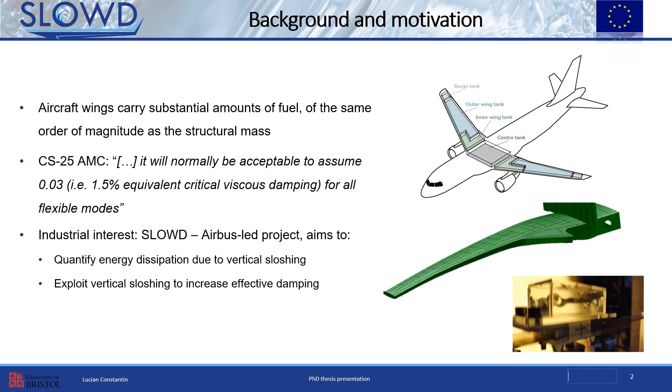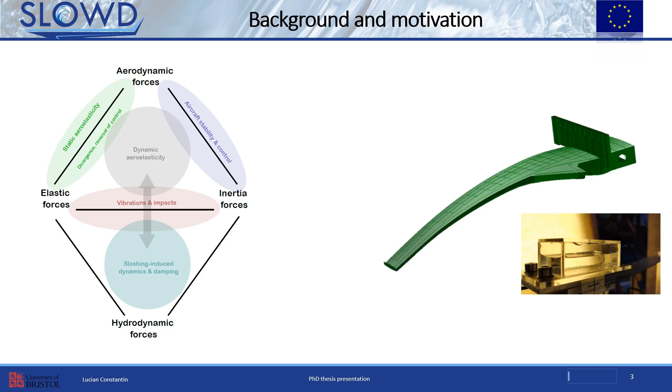These observations lead us precisely to where liquid sloshing would fit in the larger aeroelastic picture. Classically, aeroelasticity is a field of study placed at the intersection of three more fundamental interactions: elastic phenomena, inertial forces, and aerodynamic forces. The sloshing fuel is thus not modeled at all during the aeroelastic design phase of the aircraft.

There is this fourth component, which is not connected directly with the aerodynamic forces, but it does interact with them via the interaction with the wing structure.

It is thought that the inclusion of fuel sloshing during the design phase may lead to less conservative designs via the increased damping due to vertical sloshing. The reason it is not included right now is that it is rather poorly understood and modeled.

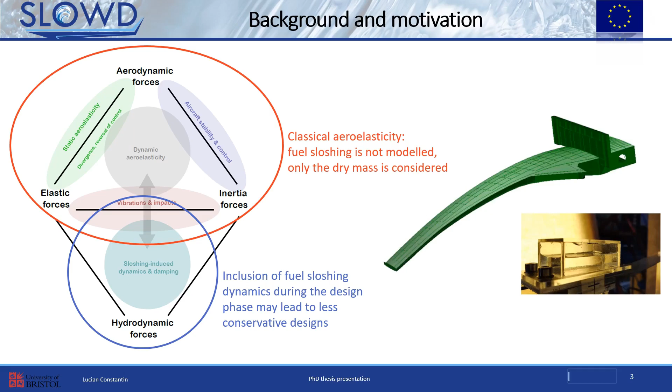Having established the background, let us turn to my thesis aim and objectives. The aim is to analyze the nonlinear dynamic interaction between aircraft wing structures and the fuel inside them, with a focus on discrete gust-type excitations.

Five specific objectives were set at the beginning. The first two objectives are set for the understanding of the fundamental mechanisms that cause the sloshing-induced damping, as well as for the initial quantification of the sloshing-induced effects in single degree of freedom vertically vibrating systems.

Based on the fundamental data gathered for objectives 1 and 2, I plan to develop numerical models in order to offer further insight, and also because they are highly relevant to current academic and industrial research. My focus was on equivalent mechanical models developed for fast evaluation of large amplitude vertical sloshing regimes, to be perhaps also included in control systems.

With a solid fundamental understanding of the vertical violent sloshing-induced damping effects, objective number 4 imposes the quantification of these effects on a scaled wing research prototype. The aim was to develop such a wing sloshing platform, instrument it, and test it in order to evaluate major influencing parameters that I noticed in previous experiments.

Finally, objective 5 seeks to synthesize the sloshing-induced damping effects based on what were quantifiably the most important influencing parameters, such as vertical acceleration and filling level. I use synthesis here in the sense of combining all components and elements to form a connected whole, namely linking the phenomena observed by investigating the single degree of freedom and multi-degree of freedom systems and the numerical models.

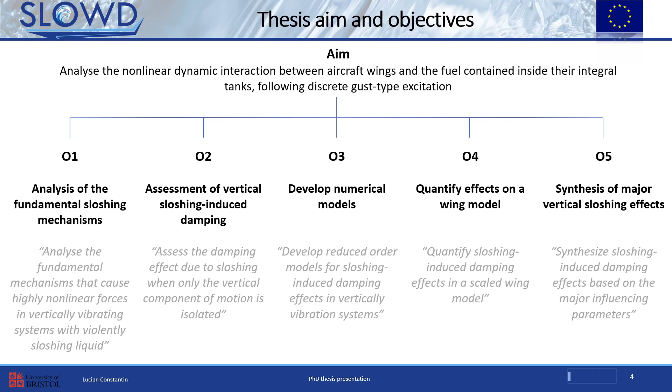In order to achieve these aims and objectives, I structured my work as shown here. It is roughly divided into 2 parts, with the first 5 chapters involving relatively fundamental research and analysis, and the final chapter presenting an applied study.

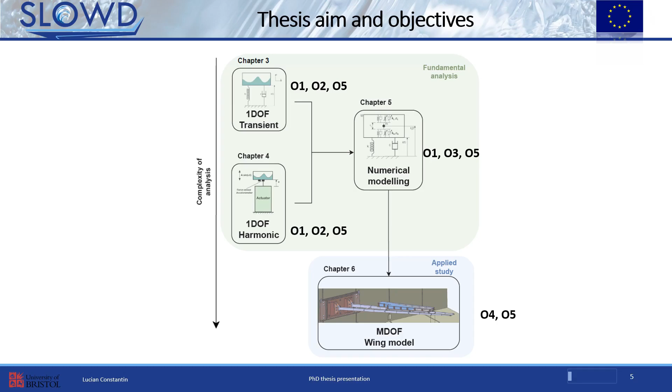Chapter 3 is concerned with the experimental analysis of a transient single degree of freedom system, Chapter 4 with the analysis of several single degree of freedom harmonically excited systems, and Chapter 5 with the development of equivalent mechanical models based on these experiments. Finally, Chapter 6 considers the design and testing of a multi-degree of freedom scaled wing research prototype, applying all of the previously learned lessons to this more realistic test platform in order to achieve objectives 4 and 5.

As also stated before, the main direction of sloshing in bending wing tanks is vertical. Let us thus start with the single degree of freedom vertical sloshing experimental studies, presented in Chapter 3 of my thesis. The design of this study implements a vertically vibrating tank which is deformed to an initial deflection and then released into free decaying vibrations. The free vibrations of the system are then analyzed.

Conceptually, such a vertically vibrating single degree of freedom sloshing system could have an elastic and a damping element as presented on the left-hand side. A low value of dry structure damping is desired in order to improve the sensitivity of the system to sloshing-induced damping effects. The experimental implementation studied in this research is presented on the right-hand side.

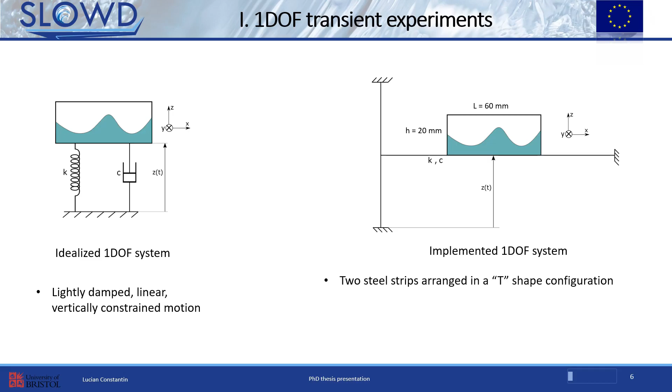Two 1 mm thickness steel strips are used as the elastic element, their T-shaped configuration allowing for substantial linear deflections of the attached tank of up to 14 times the strip thickness. It was shown that this configuration limits the tank motion to the vertical direction.

Alternative configurations are possible too, like the approach of our colleagues at the Polytechnic University of Madrid, where they used grounded springs instead of steel strips.

The system vibrates at a dominant frequency of 10.05 Hz and the measured stiffness is 1100 newtons per meter. This leads to an equivalent mass of the system of approximately 276 grams. The dry structure damping ratio value was experimentally measured in the interval of 0.23 to 0.34%.

A slight nonlinearity in damping can thus be observed, the damping increasing slightly at high accelerations. This, however, is inconsequential to the experiments presented here.

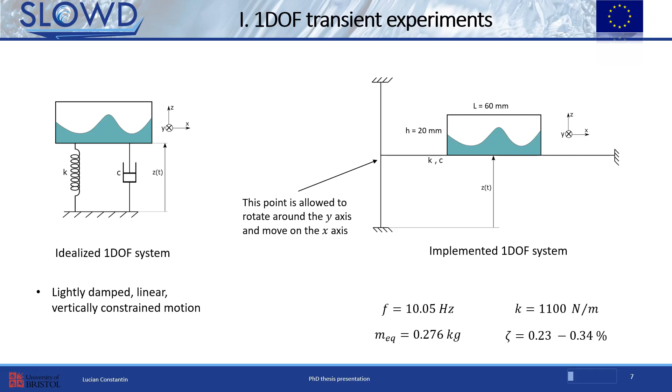An accelerometer is placed underneath the tank in order to measure its dynamic decaying response, and a high-speed camera was also used for further image analysis of the sloshing patterns.

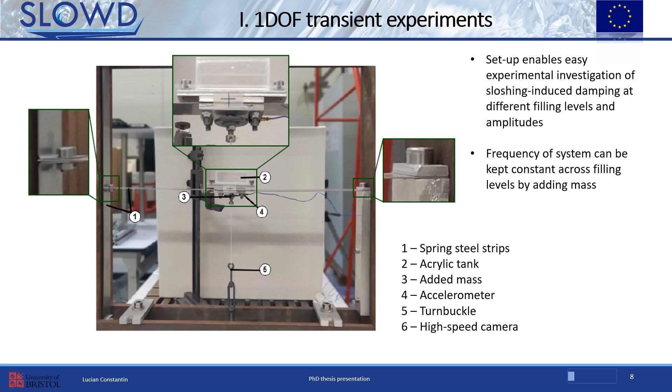Let us now move to results. In this slide we can see a time history of the tank accelerations for the dry structure versus the 50% filling level case. First of all, there is a marked difference in the response amplitude between the two cases, adding water into the system reducing the tank amplitude quicker.

The frequency of the system is kept constant at 10.05 Hz, regardless of the filling level by using the added mass. The energy dissipation rate was observed to be exponential, typical of viscous-like damping, and having different values at different times. This leads to the emergence of three different damping regions.

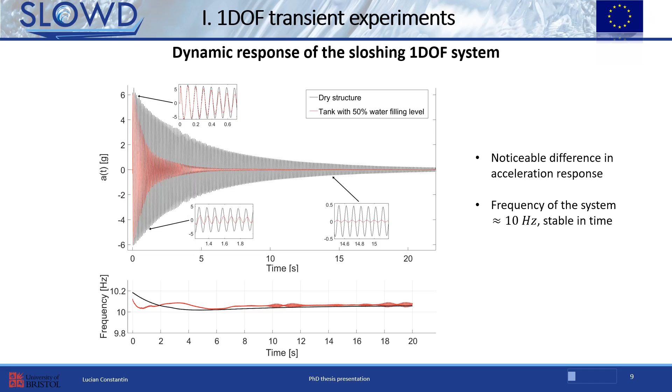Although harder to notice on a linear scale, it is oftentimes easier to observe damping behavior on a logarithmic scale. In this example, only the envelope of the acceleration signals for the 50% filling level and dry cases are represented on a logarithmic scale. If the envelope varies linearly on a log scale, the viscous damping ratio can be measured from the slope of the curve.

It is thus easier to observe the three damping regions corresponding here to the three different linear regions. First of all, it's important to note the very low damping in the dry structure, seen by the slope of the black curve in this graph.

Also, you can see here the very small nonlinearity in damping I mentioned earlier, and how it really has no effect on the larger picture.

A correlation has been observed between the different damping zones and the physical behavior of the fluid, as seen here and categorized as region R1 with turbulent vertical fluid motion, region R2 with symmetric lateral sloshing motion, and region R3 with small fluid activity following the tank base motion.

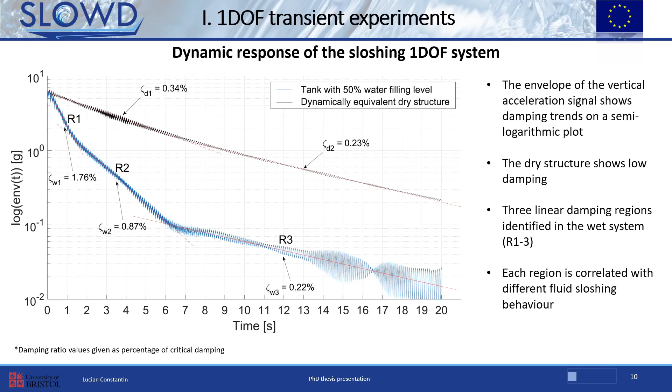It is worth taking a closer look at the fluid's behavior in these three damping regimes. In the first region, corresponding to the highest levels of damping, the fluid absorbs energy out of the primary system via repeated impacts with the bottom and ceiling of the tank, as you can see in this video. This regime is thus characterized by violent, turbulent vertical motion of the liquid.

A damping ratio of approximately 1.76% was obtained for this particular experiment, the tank's peak amplitude being reduced from 14 mm to approximately 3 mm in little more than 10 oscillations.

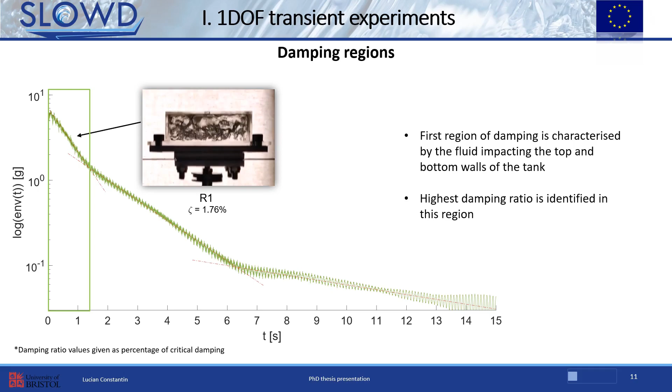The second region of damping occurs immediately after the peak acceleration level in the system reaches 1 g, and the turbulent vertical motion of the fluid is stopped.

R2 is characterized by fluid sloshing on its first symmetric sloshing mode, in this case, for which standing waves with symmetric motion is typical. The dissipation mechanism is related to the transfer of energy from the vibrating primary system to the fluid sloshing on one of its modes.

The damping ratio obtained is lower than what we've seen in R1 at 0.87%, and the peak amplitude of the tank is reduced further in R2 from 3 mm to approximately 0.4 mm in this case. Substantial levels of damping are thus associated with R2 as well. Also notable is the duration of this regime, lasting for approximately 5 times more cycles than R1.

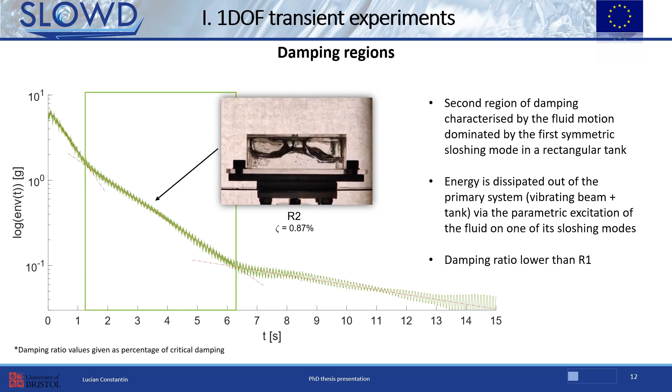The third region of damping is relatively uneventful. At the end of R2, the motion of the system is greatly reduced, and consequently the fluid stops sloshing as well. The value of the R3 damping ratio is the same as the dry structure damping at 0.22%.

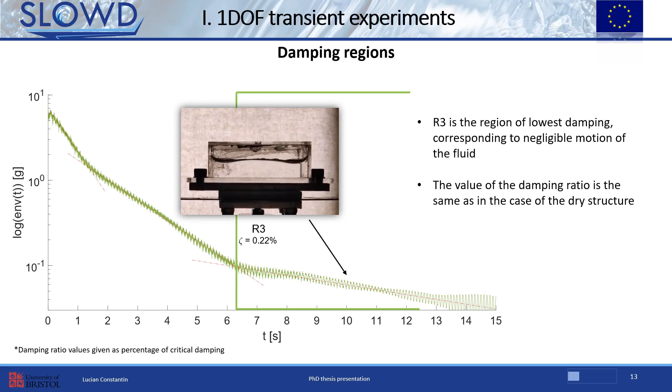Two different sets of experiments were performed to systematically investigate the effect on sloshing behavior when varying the filling level in the tank, and also when increasing the initial deformation before the step release. The aim of the first set of tests, on the left-hand side, was to explore the effect of different tank filling levels on the transient response whilst maintaining the same initial deformation.

The beam was pulled downwards by the cord attached to the turnbuckle so that an accurate and repeatable amount of deflection, 14 mm in all cases considered here, was possible. Filling levels between 0 and 100% were considered.

The second set of tests considered the effect of changing the initial displacement between 1 mm and 14 mm, and hence the maximum acceleration experienced, which is up to 7 Gs, before the system was released into free vibrations. These tests were repeated for 3 different water filling levels of 30, 50 and 70%.

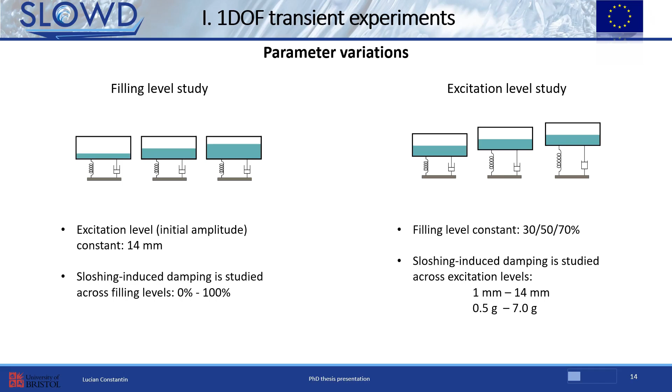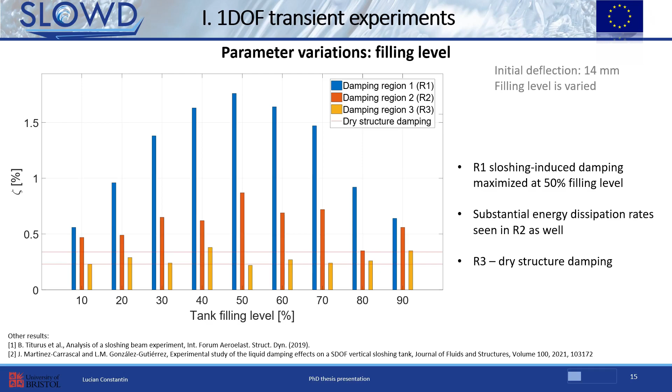The R3 damping is found to be very low overall and close to the underlying damping of the dry structure. This finding is consistent with the qualitative behavior of the fluid observed in the previous slides, namely that in region R3 the fluid contributes very little to the system's energy dissipation.

The effect of excitation level or maximum acceleration level on sloshing-induced damping is assessed by varying the peak acceleration via different initial deflections for 3 different filling levels. The main result is shown in this figure, where damping in the first region is shown as a function of the maximum acceleration amplitude A0 over G.

The damping trends for the 30, 50 and 70% fill level cases are compared. As in the previous slide, it can be seen that the R1 damping levels for the 30 and 70% filling levels are similar. A piecewise linear function was fitted over the R1 damping versus maximum acceleration data.

Two linear regions are thus established, and similar slopes are obtained for all 3 filling levels, with the line corresponding to the higher excitation levels having a considerably lower slope compared to that at lower excitation. The damping ratio thus only increases slightly after the acceleration threshold is reached, mainly due to the dry structure damping nonlinearity.

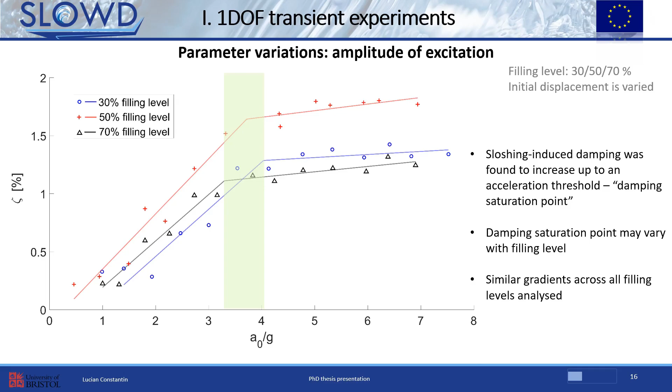It follows that only slightly more energy is absorbed in the R1 region as the maximum acceleration level goes past the approximately 3.3 G threshold. The second experimental campaign is focused on the harmonic excitation of rectangular partially filled tanks in the vertical direction, and it was done in two parts using different actuation techniques.

This was done in two parts using different actuation techniques. We have already seen how the sloshing system behaves under transient large amplitude conditions, and we now shift focus to steady-state behavior with well-controlled sinusoidal motion, thus constant amplitude and frequency of excitation.

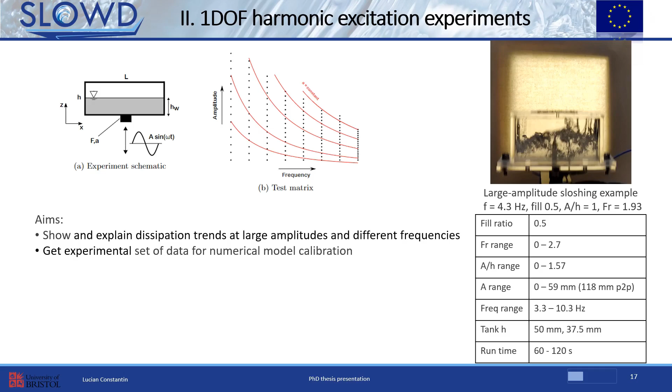The specific aims of this study are to show and explain the dissipation trends at large amplitudes and different frequencies of excitation, and these are the types of regimes that are considered here. The second aim is to gather supplementary experimental data for numerical model development and calibration.

The main challenge in this type of study is achieving large vertical amplitudes whilst maintaining the tank dimensions large enough such that the effects that we are interested in are still dominant. So for example, we will have no significant surface tension effects.

The setup thus consists of a rectangular tank, 100 by 30 by 50 millimeters, partially filled with liquid, placed on top of a large amplitude shaker with a force sensor in between. An accelerometer is also placed on the tank in order to collect the tank acceleration, velocity, and displacement information.

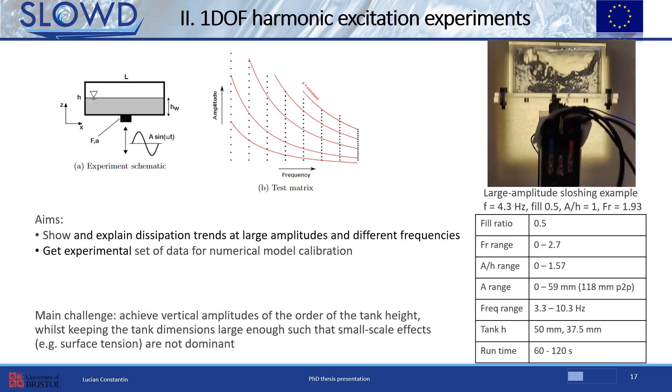Different amplitudes and frequencies of excitation are considered according to a pre-established test matrix that you can see here, with the details presented in this table. Each amplitude and frequency combination was studied independently, with each test running for a sufficiently high number of cycles in order to achieve steady-state behavior and to have a representative number of tank cycles to analyze.

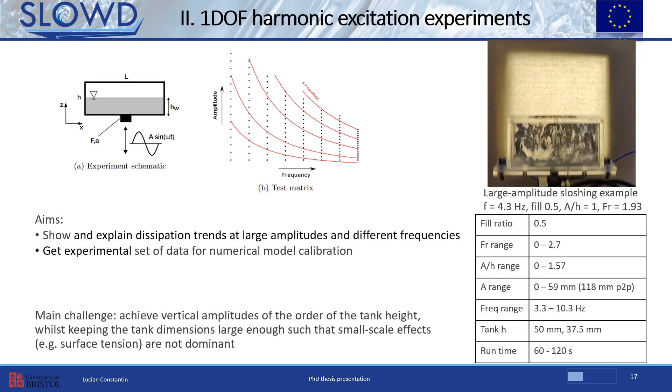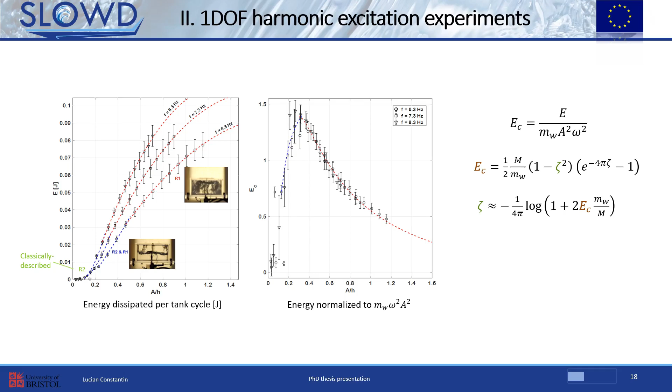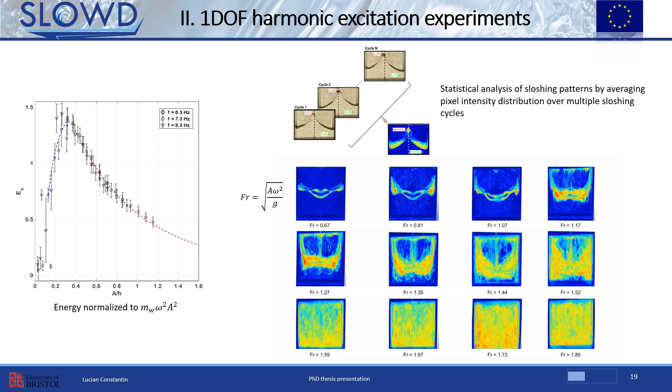The velocity field of the liquid relative to the tank can also be obtained using optical flow, shown here with the black arrows and the streamlines in red curves. These are some instances of the sloshing pattern at one set amplitude of excitation. Together with the sloshing force information, which can be derived from the force sensor, and the information from the accelerometer, there is complete kinematic and dynamic information that is available experimentally for detailed analysis.

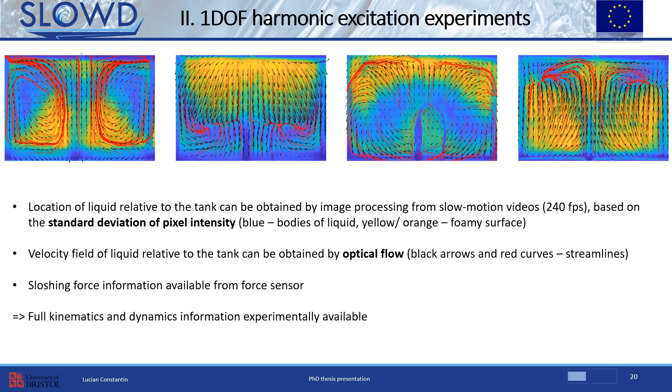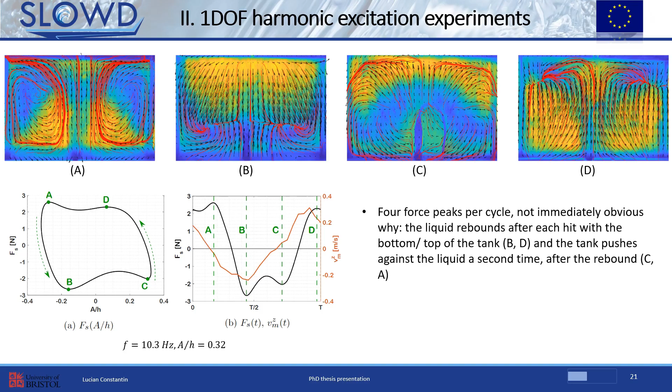This phenomenon is easier to see at large amplitudes by looking at the liquid mean relative vertical velocity, the orange curve on the right-hand side. Following the rebound of the liquid, as the tank goes upwards, the liquid starts to push against the bottom of the tank the second time, creating a new interactional activity against the upwards motion of the tank. This effect causes the average liquid bulk velocity, Vzm, to be constant between points B and C, and subsequently the recorded sloshing force features a second peak at point C.

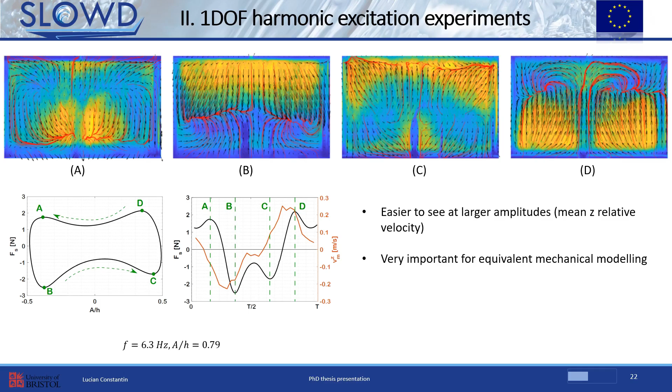This happens because the phasing between the tank velocity and sloshing force changes, with the liquid hitting the bottom of the tank, aided by gravity, before the tank reaches its minimum stroke position. Under such conditions, the sloshing force does not act in quadrature to the tank velocity anymore, and, instead of having a dissipative effect, it rather adds energy back into the system.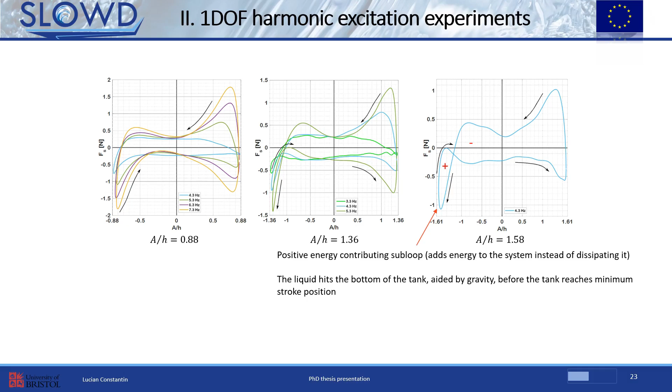In turn, the development of these secondary hysteresis subloops explains why the dimensional energy dissipation trends deviate from the linear increasing trend at large amplitudes, with a decreasing parabolic trend being introduced for all frequencies of excitation.

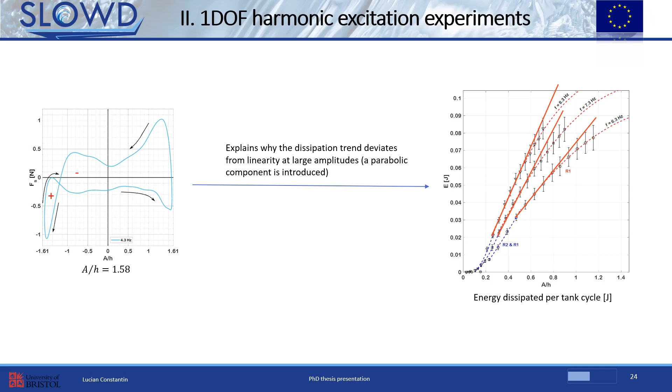This wealth of experimental data can be further used for the development of numerical models. The use of numerical tools at different levels of fidelity, such as smooth particle hydrodynamics (SPH), volume of fluid (VOF), and equivalent mechanical models (EMMs), or reduced order models (ROMs), is well established in fuel sloshing and fluid structure interaction research. With the advent of high-performance computing, the use of detailed high-fidelity models for liquid sloshing problems is an attractive option. Alternatively, when in need of fast or large numbers of computations, such as for optimum wing design, the use of low-fidelity models might be preferred.

Equivalent mechanical models are based on simplified representations of the physics involved in the problem and provide a simpler formulation of the dynamics of the sloshing system.

As this work is concerned primarily with a transversal out-of-plane dynamic interaction between a sloshing liquid and a tank, this leads to a problem formulation different in nature compared to classically investigated sloshing systems where the liquid movement is lateral. In this work, I considered three different equivalent mechanical models, emphasizing their different features and limitations, together with supplementary explanations based on the model physics.

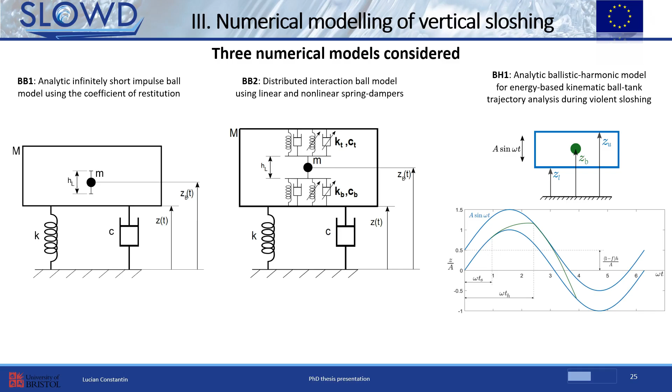The following numerical models are studied in this work with their key characteristics: an analytic infinitely short impulse ball model using the coefficient of restitution; a numerical distributed interaction ball model using linear and nonlinear spring dampers; and an analytic ballistic harmonic model for energy dissipation, using ball-tank trajectory analysis during violent sloshing. I will take each of them separately and present their main features and results.

In the first approach, I modeled the bulk vertical motion of the liquid using a ball falling under gravity and interacting with the tank via a coefficient of restitution. The work on this model is motivated by the T-beam transient experiments discussed earlier, and the focus is placed on the R1 vertical violent motion.

Based on experimentally observed behavior, namely how the violent vertical liquid motion causes additional damping, this work uses a phenomenological EMM, where a simple linear spring damper mass oscillator is combined with a single free-flying ball contained and interacting with the upper and lower boundary of the oscillating system's mass.

The spring damper mass part of the model represents the mechanical structure with the tank of mass M (uppercase), stiffness K, and damping coefficient C. The ball in this model represents the fluid during its vertical R1 sloshing stage.

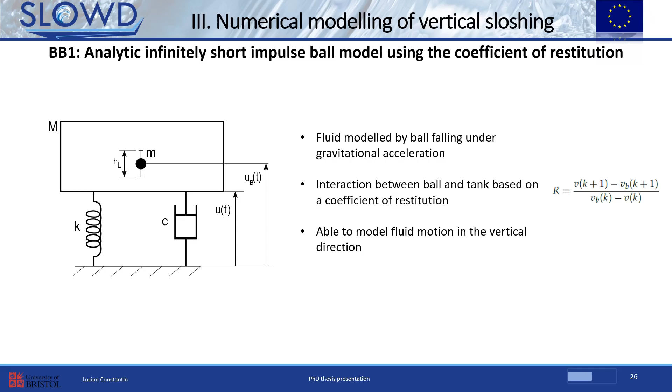While classically referred to as a bouncing ball, in this case it behaves as a bouncing rigid body because it has a certain height, HL, depending on the water filling level, and is represented in this figure as the rigid bars above and below the ball. This model was tuned over multiple filling levels and tested against multiple amplitudes of excitation.

Here we see a comparison between the experimental data, the equivalent mechanical model results in black, and higher fidelity SPH simulations performed by my colleague Joe DeCourcy. The EMM gives good results in R1, the region with vertical impacts, and it does not model R2 at all.

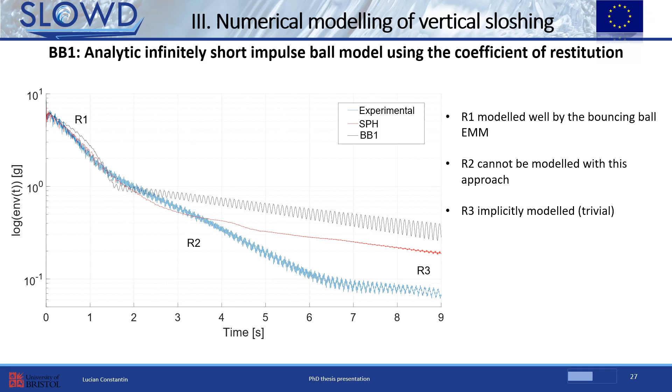Thinking about what R2 means, remembering this type of low amplitude permanent wave motion, it indeed cannot be modeled by a vertical bouncing ball. In comparison, the higher fidelity SPH simulations model part of the R2 region.

It is interesting to note the almost exponential envelope in R1, as shown experimentally and predicted with SPH, whilst the EMM indicates an evolution that deviates from this trend. On average, the damping ratio is the same in R1, but the different envelope shapes indicate a different dissipative mechanism.

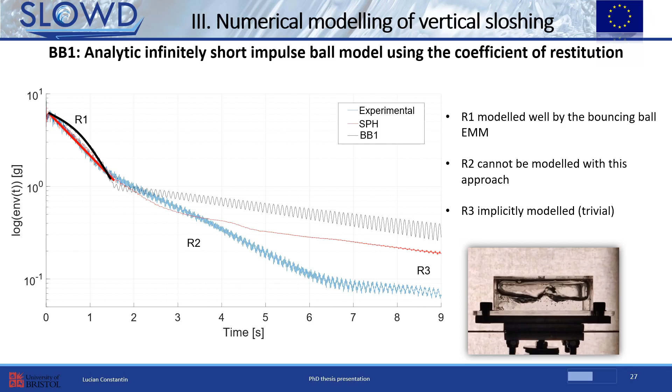Finally, we can look at the variation of R1 damping with respect to the amplitude of excitation, horizontal axis here. Both sets of data predict the same damping saturation point, and the mean values are similar, indicative of good prediction capabilities across a large range of amplitudes of excitation.

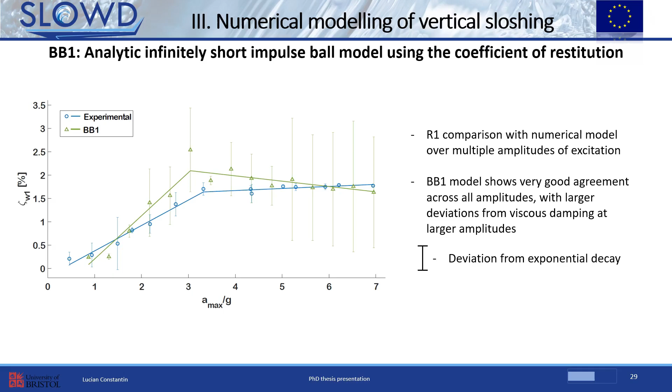However good the agreement is, this model has certain shortcomings, namely the effect that the dissipative mechanism indicated by the coefficient of restitution approach seems to be different than the actual sloshing experimental prediction. This aspect is likely related to the fact that the sloshing interaction is distributed across the tank cycle, as we

have seen, whilst this numerical model only considers discrete ball-tank interactions, many times only 2 of them per tank cycle, as shown here as maximum and minimum tank displacements. One model that addresses this aspect is the distributed interaction model, which I present next.

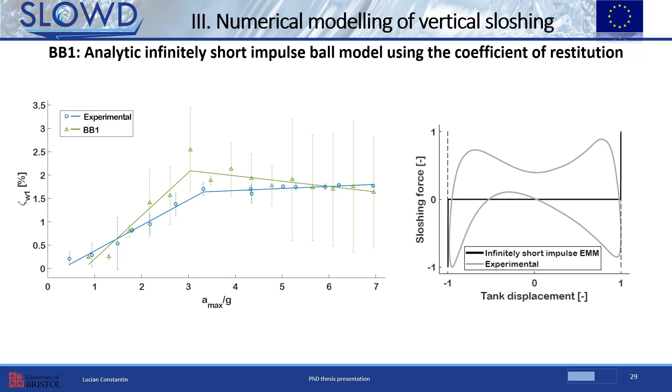The aim with this second model is to address these differences by investigating the possibility of using nonlinear spring damper connections between the bouncing ball and the tank, replicating at least certain aspects of the hysteresis cycles observed experimentally. There is a combination of bottom and top linear, third order and fifth order springs and dampers to model the ball-tank distributed interaction. The top and bottom elements can be different in order to make it easier to introduce possible asymmetries in both the bottom and ceiling interactions, even though they are kept the same in this work.

Similarly to the previous model, this one was tuned by minimizing the difference between the experimental and numerical energy dissipation prediction.

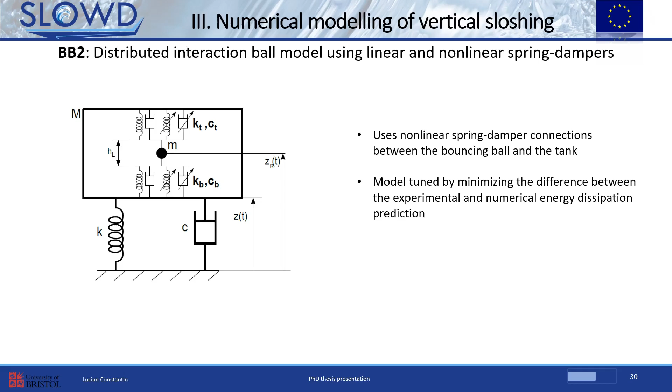Jumping to results, this figure shows a comparison between the experimental and numerical results in terms of dissipative energy per cycle and sloshing forces. Note that there are no error bars associated with the numerical results in this case, as there is no time variation in the numerical hysteresis cycles and hence in the induced dissipative energy.

The numerical results were computed using 2 different types of damping indicated by the values J, namely dependency of the damping force on the third and fifth power of velocity, according to the relationships shown here.

The dissipative energy versus amplitude results on the left-hand side indicates a very good match between the model with the two different damping scenarios and the experimental results. For the third-order damping case, the energy values are slightly over-predicted for the lowest and highest amplitudes, showing a decreasing trend past the amplitude normalized to tank height of 0.3, with a lower slope than observed experimentally.

The fifth-order damping case shows a closer match to the experimental results, with a similar high-amplitude trend and better low-amplitude prediction. According to the hysteresis cycles that are shown on the right-hand side, in the j=3 case, the shape of the hysteresis cycle is very similar to that observed experimentally, but rotated counterclockwise.

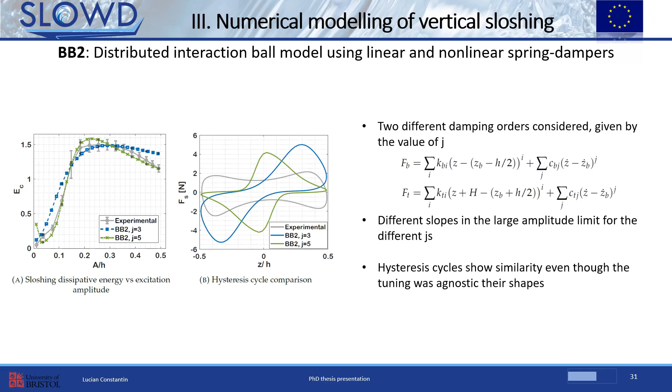The modeling approaches considered thus far were based on different formulations of the impact force between a ball and a tank, namely via a coefficient of restitution which causes a change in momentum, or combinations of springs and dampers which increase the complexity of the interaction.

Earlier, however, it was shown that there is a similar large amplitude damping trend, at least inside a considerable frequency range, meaning that the non-dimensional energy dissipation curves overlap in the frequency range of 5.3 to 10.3 Hz. Moreover, similar damping trends were observed and modeled using the same tools in the field of particle impact damping.

There is thus a strong indication that, at least at large amplitudes, the vertical sloshing system exhibits energy dissipation properties that transcend the liquid-specific qualities. The motivation of this numerical approach is to exploit kinematics-based reasoning for the fast and efficient computation of damping saturation limit and the large amplitude sloshing-induced damping.

The hypothesis here is that at large Froude numbers, the kinematics of the problem, or the liquid tank impact velocity and the number of liquid tank roof or bottom impacts in one cycle, is determinant to the amount of the sloshing-induced dissipated energy.

In order to test this hypothesis, a kinematics-based ballistic harmonic model, called here the BH model, is employed. The analysis assumes the fluid may be treated as a single lumped mass following a ballistic path within a harmonically oscillating upper and lower wall, as indicated in this figure. The sinusoidal motion of two fixed distance walls is considered with a particle between them. There is no lateral motion, the fluid may not fragment, and no free surface modes are considered. Collisions are treated as inelastic, although this is clearly a significant simplification, one which can only finally be justified by the relative accuracy of the derived model.

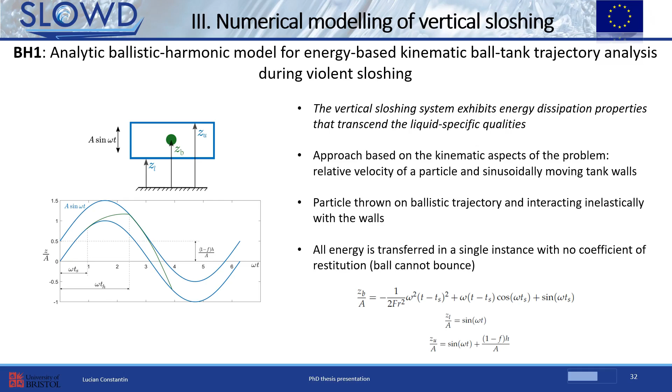Kinematics-based reasoning of the dissipation trends is explored at multiple frequencies and amplitudes of excitation. This type of experimental data was shown earlier and is also used here for comparison against the BH model.

These figures show the interpolated experimental sloshing energy surfaces and the corresponding experimental maximums EC, shown in red squared markers. In the same figure, there is also shown the BH prediction for the maximum EC values, the gray curve, and the curve above which there are intersections with both ceiling and bottom of the tank, the dashed gray curve.

As the acceleration of the tank increases, it imparts to the ball a high enough energy such that it hits both the ceiling as it goes up and the bottom of the tank as it comes back down, both within one single tank cycle. It can be seen that the experimental data generally follows closely this trend established by the BH model. The dissipative energy is maximized in the vicinity of the region where the kinematic conditions are met, such that the liquid can impact both the top and the bottom of the tank twice per single tank oscillation cycle.

This observation is important because it provides additional support to the idea that the lumped liquid behavior is the determinant for the amount of energy dissipated following the vertical interaction with the tank. Specifically, the kinematic condition is related to the initial velocity that must be imparted to the liquid, causing it to enter a ballistic trajectory inside the tank such that two impacts with the tank per one cycle are possible.

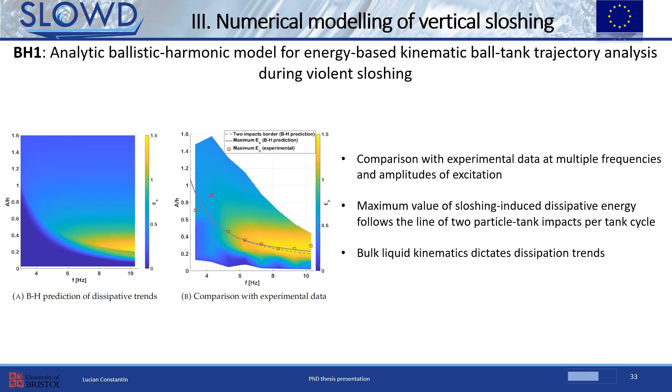The same numerical data can be used to show how the tank vertical acceleration varies with tank amplitude and frequency when EC is maximized. The major assumption of this model is that there is a steady-state harmonic tank motion. It does not take into account transient effects, even though similar conclusions may still be applied to transient cases where the vertical flow develops rapidly.

For example, having in mind the T-beam system discussed earlier, this graph indicates that the vertical acceleration for which a system vibrating at approximately 10 Hz maximizes the induced damping effect is 3.5 Gs. This value corresponds very well with the experimentally observed damping saturation point shown earlier.

To sum up, three vertical EMMs were investigated in this thesis, each with their own advantages and disadvantages, emphasizing different aspects of the vertical sloshing interaction. In what follows, I am going to present the last part of the thesis, which was concerned with an applied, more complex study.

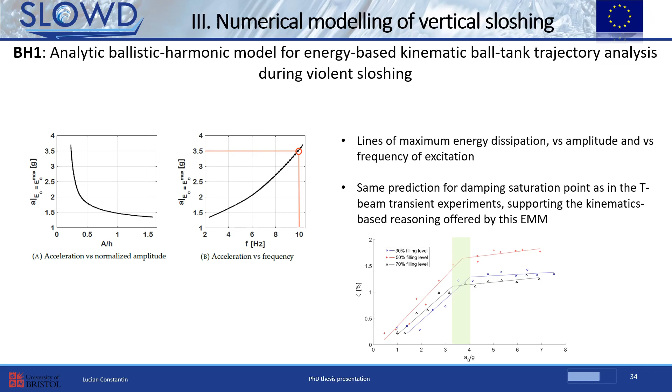Going back to the structure of my work, the final step in understanding the complex vertical violent sloshing phenomena in aircraft wing tanks is to study a multi-degree of freedom scaled wing model. The setup is called MiniWoT, or Mini Wing of Tomorrow, and it represents a scaled research wing prototype whose structure and fuel tank was Froude scaled such that it correctly represents the dissipative energy due to sloshing in a scaled way.

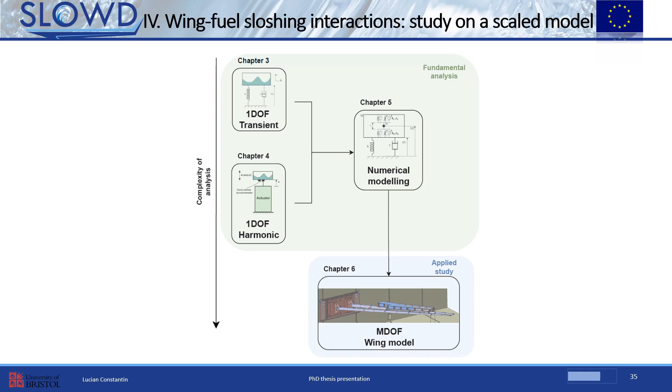The scaled structure setup is shown here. It is approximately 3 meters long and consists of an underlying structure with 2 spars and 5 torque tubes cantilevered to a strong wall, shown here in blue. The main feature is the scaled fuel tank spanning a considerable length of the model, which had to be placed on top of the structure in order to observe the sloshing patterns.

Two loading points, one at the leading edge and one at the trailing edge, are used to load the structure down and release it. Following the release event, the structure vibrates freely and its response is measured using accelerometers distributed across the model, shown here underneath. One accelerometer at the tip of the tank is used for the current work. Two high frame rate video cameras are used as well to observe the liquid inside the tank from top and lateral.

I'm going to present multiple sets of tests, such as the case with 50% filling level where the baffled tank is filled to 50% capacity with water, and the equivalent dry mass distribution case where the liquid is replaced with its frozen equivalent. Multiple parametric studies were conducted though, where the filling level was investigated as well as the initial amplitude, baffle design, and dihedral angle.

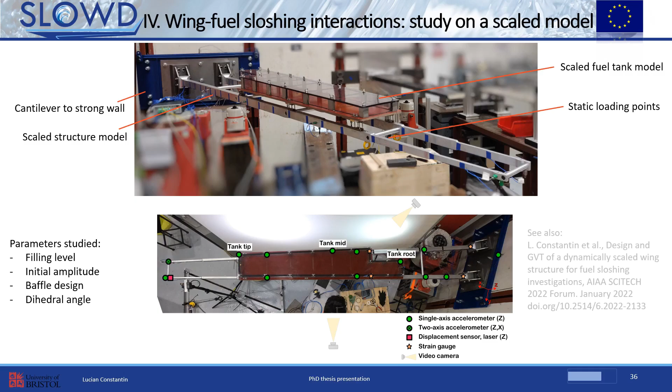Let us start by looking at the acceleration at the tip of the tank versus time for the two cases. Note that the time values are normalized to the period of the first bending mode. Each test was repeated three times, and mean values of accelerations are shown here, together with the red and green bands indicating minimum and maximum acceleration values.

Following the step release event, the motion decays freely and the response is multimodal, as multiple frequency components are excited. As time progresses, each frequency component is damped at different rates, as can be seen in the insets here. This also shows that immediately after the release event, the wet structure has significantly lower acceleration amplitudes, indicating important additional damping effects.

These acceleration signals can be unpacked into their frequency components and studied comparatively. A nonlinear least squares approach was used for the transient system identification, and today I'm not going to delve into the details of it, as this single discussion in itself can be quite lengthy, but rather jump directly to the results.

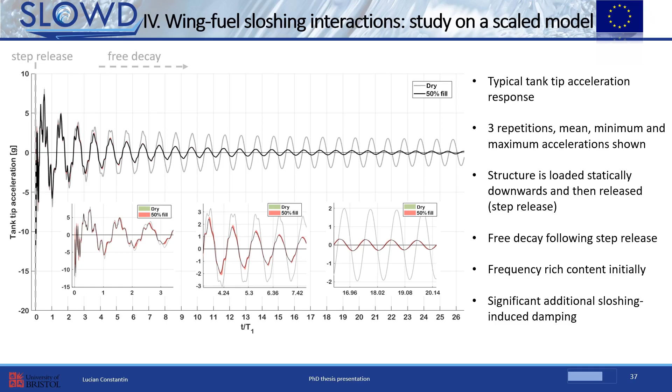Here you can see a representation of the dominant structural vibration modes that were used for the identification of the dry system. This is an amplitude-frequency characteristic of the dry signal shown previously, and note that because the system is nonlinear and the frequency is not constant in time, we make the distinction between uppercase F, which corresponds to the natural frequency of the system, and lowercase f, which is the frequency of the time-varying component.

There are four dominant normal modes: the first and second out-of-plane bending mode, the first torsional mode, and a higher frequency bending mode, and you can see the corresponding shapes shown here on the upper side.

The FFT of the reconstructed signal using the nonlinear least squares procedure is shown here in green as well, and there is a very good match between it and the original system, indicating that all features of the system are correctly captured. For this presentation, I will only focus on the first out-of-plane bending frequency component, as this one was found to be most affected by fuel sloshing.

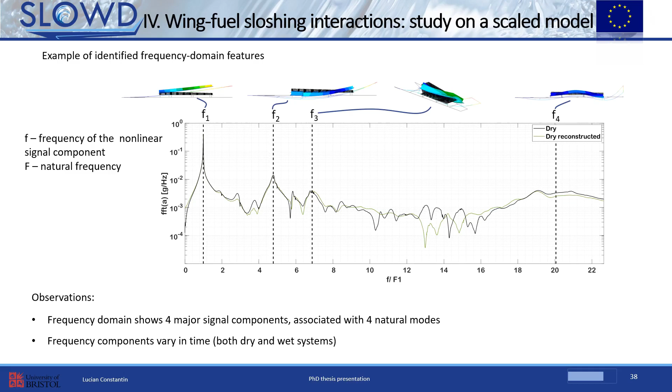Moving on to fuel sloshing results, here we see the first component's amplitude versus normalized time for the dry and wet cases, with mean values and error bars showing the variability between three test repetitions. We see that the amplitude drops much faster for the wet case, indicative of substantial additional damping when the tank is partially filled.

Focusing on the first part of the transient immediately after the step release at A, we can see in the inset that the amplitude is lower in the wet case, starting with the second half of the first period of motion. Here we also see a video from the side of the tank for the wet case.

The inner root section of the tank is on the right-hand side and the tip is to the left-hand side. In the first half period of motion, the liquid does not impact the top of the tank, and consequently, the amplitudes are similar in the two cases.

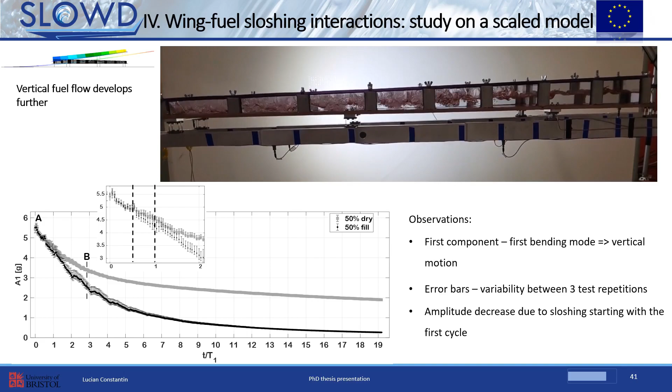Starting with the second half of the cycle, the liquid starts hitting the tank at the tip of the wing, and the amplitude of the first frequency component starts dropping immediately. This then continues afterwards as the flow develops into violent vertical sloshing in multiple tank cells.

Here we also see the normalized frequency and damping ratio versus amplitude, again for the dry and wet cases. It is interesting to note that the error bars are larger in the wet case, indicative of less repeatability due to the chaotic nature of liquid motion.

These graphs should be read from right to left if we have the time variable in mind, since the maximum amplitude is reached at the release point A. The frequency trends are similar between the wet and dry cases, increasing as the amplitude drops, likely caused by nonlinearities in the dry damping due to friction effects at the root.

Substantial nonlinearity is seen especially in the damping shown here on the lower side. The dry structure damping comes mostly from the root and joints of the structure, whilst the wet case shows substantial additional damping due to the liquid action.

I also marked the point B, showing the point where in the wet case shown here, the damping versus amplitude changes its variation from approximately constant in the AB region to constantly declining afterwards. Studying what the liquid does in the AB region, we see that the sloshing regime is dominated by vertical violent motion, which then starts to decrease in amplitude depending on the local spanwise position.

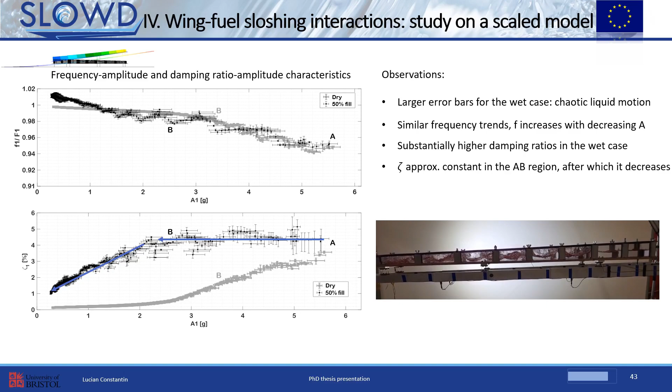This phenomenon is consistent with previous findings in simpler vertical single degree of freedom sloshing experiments, shown here on the left-hand side. We have already seen that depending on the violence of the vertical sloshing, the damping value shows different trends. At the highest amplitudes, it reaches a plateau and actually decreases afterwards, while at lower amplitudes it increases linearly depending on the amount of interaction with the ceiling of the tank.

We observe the same trends here, where initially there is violent, turbulent vertical liquid motion, which then decays into lower amplitude sloshing, while still dissipating substantial amounts of energy out of the system. In the wing case, additional complexity is added by span-wise acceleration effects, dry damping, and tank geometry.

This last point brings me to an example where, even though the local acceleration is virtually the same in these two indicated neighboring cells, the sloshing patterns are very different due to differences in local geometry. This suggests that the shape of the tank can be altered to promote significantly more liquid motion and consequently induce damping effects.

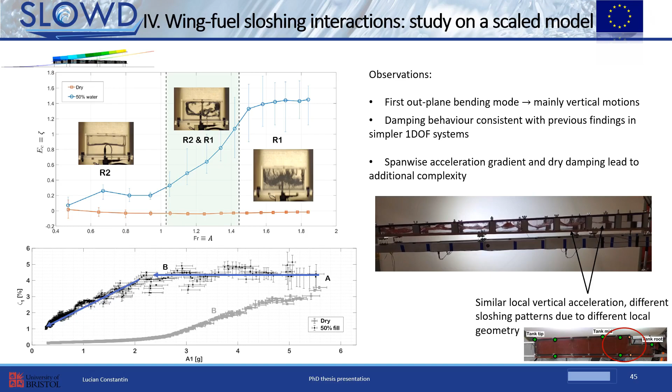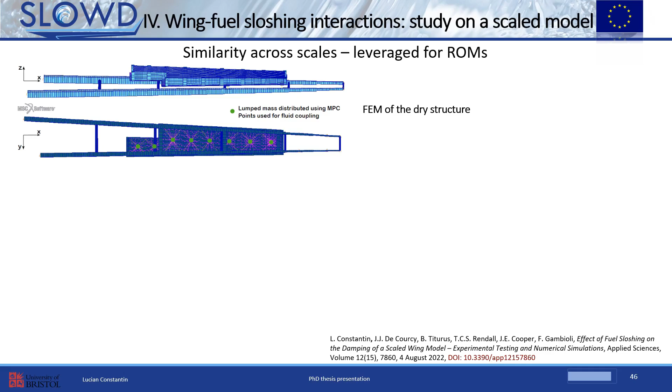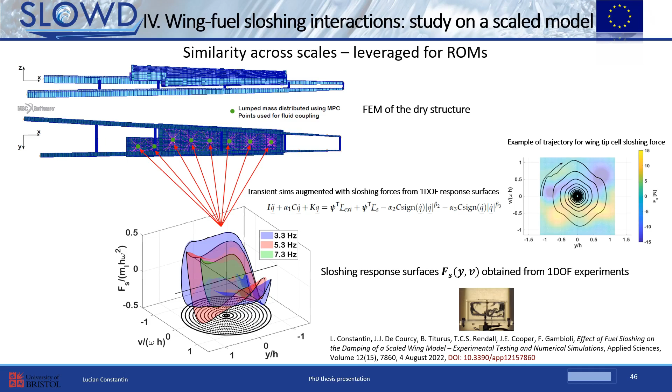As a side note, this similarity across scales can also be leveraged to formulate reduced order models. A finite element representation of the scale structure can be coupled with the sloshing force response surface of the single degree of freedom results in order to include the effect of liquid sloshing in more complex simulations. This approach gave very good initial results, which can be found in this reference shown here, and I will not go into details in this presentation.

Moving forward, there are also other effects observed based on various parameters that were modified. Multiple experiments were conducted at various initial amplitudes of the step release. The damping and frequency versus amplitude trends are shown for four of such tests.

Because it takes time for the sloshing flow to develop, and this time differs from one amplitude to the next, the nonlinear damping trends induced by the sloshing motion also differ. Depending on the initial amplitude, the damping values start close to the dry case, and then, when the sloshing motion is fully developed, they converge to the same values.

It is interesting to note that the frequency values are largely unaffected, confirming that the fuel motions are not the main driver, in these cases, of the frequency dependency on amplitude.

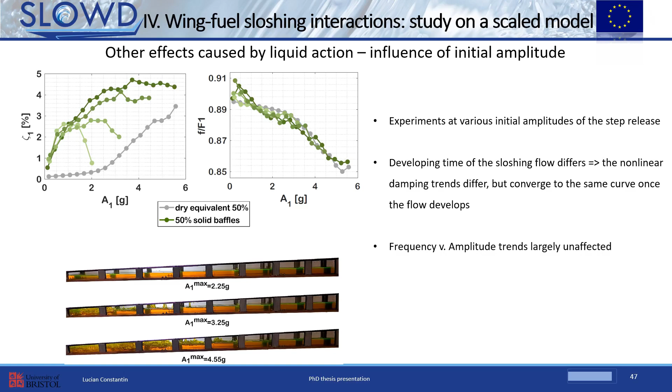Finally, it is worth taking a look at the most realistic case considered: the case with positive dihedral and baffles with scaled geometry. Multiple experiments were performed at filling levels between 10 and 90% with 10% increments, and snapshots of the developed flow after 7 periods of motion are shown on the left-hand side.

On the right-hand side, I show the damping ratio and frequency characteristics in different forms for all filling levels. There are substantial differences between filling levels, and the maximum sloshing-induced damping was obtained in the 40 to 60% fill range. We can correlate these trends with the sloshing active cells, meaning the tank cells where any sloshing happens at all, and also with the sloshing active fraction, meaning the fraction of the liquid volume which is moving for each filling level.

For instance, in the 90% fill case, we can see on the left-hand side that cells 1 to 4 are completely filled with liquid due to the dihedral, and no liquid movement was observed there at all, whilst only about 40% of the volume of liquid is active and sloshes.

From a dynamics point of view, the completely filled cells act as dry mass, still modifying the wing frequencies, but with no effect on damping.

The table on the right-hand side shows that the fraction of the mass which contributes to energy dissipation changes its span-wise location with filling level, shown via the active cells, and also that the active liquid fraction varies with filling level. There is thus an interplay between the amount of liquid inside the tank, the amount inside each cell, and the span-wise placement of the active cells, and all of these factors determine the nonlinear damping trends and the maximum values that are achieved.

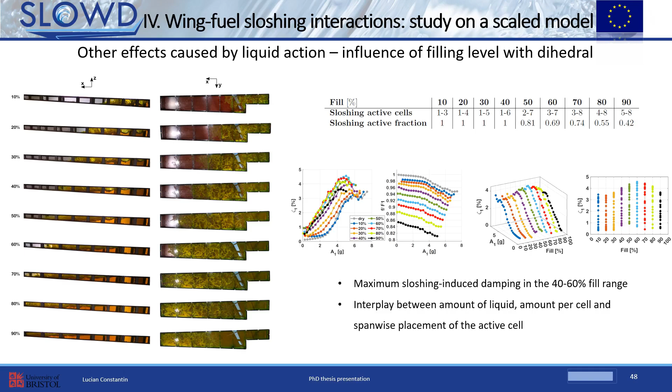This concludes the overview of the thesis, and much more detail can of course be found in the manuscript. The work presented in this thesis improves the understanding of nonlinear dynamic interaction between aircraft wings and the fuel contained inside their built-in tanks. The objectives formulated at the beginning of the work were met, and the following overall conclusions may be drawn.

Multiple fundamental approaches were taken to the problem of vertical sloshing in order to address the research objectives, isolating the vertical component of the wing dynamic response due to gusts via multiple single degree of freedom investigations. The effect of vertical violent liquid sloshing on the transient single degree of freedom liquid structure coupled system was studied using the T-beam experimental campaign shown in chapter 3, where a rectangular tank containing a variable amount of liquid was placed on an elastic element and released from a deformed position.

The sloshing-induced damping ratio in vertical sloshing systems was demonstrated to be dependent on the filling level, with the maximum amount of damping achieved at 50% fill. Depending on the amplitude of excitation, three piecewise linear regimes were noted and correlated with the liquid motions.

Further research into the fundamentals of vertical sloshing was conducted via two experimental campaigns that used harmonic excitation at set frequencies and amplitudes, investigating separately the different vertical sloshing regimes. Sloshing force information was available at the tank actuator interface, and the displacement, velocity, and acceleration of the tank were measured or derived. This measured information, together with sloshing pattern analysis based on high frame rate video footage, provided comprehensive experimental characterization of the dynamics and kinematics of the sloshing system.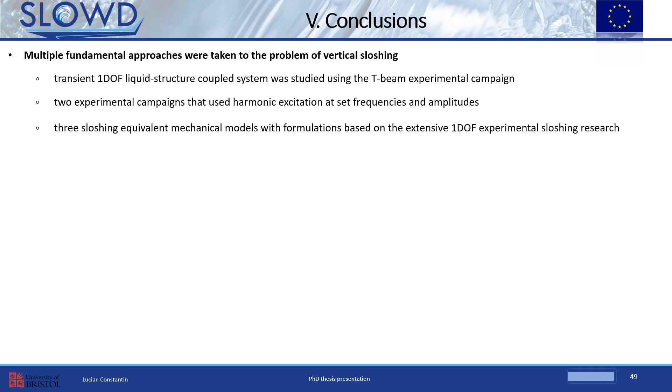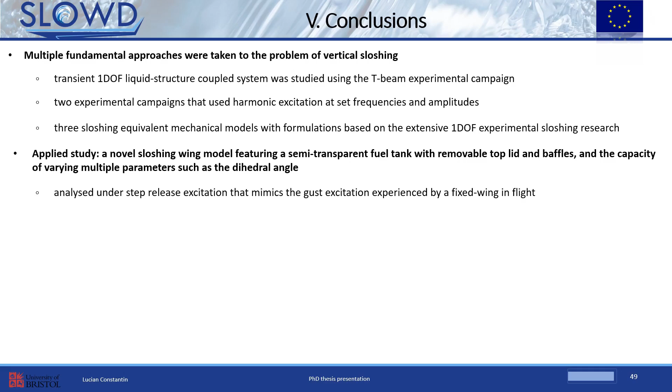Building upon the extensive fundamental understanding of single degree of freedom vertical sloshing, a novel sloshing wing model was designed and built in order to address the research objectives. The rig featured a semi-transparent fuel tank with a removable top lid and baffles, as well as the capacity of varying multiple parameters, such as the dihedral angle. The sloshing system was analyzed under step-release excitation that mimics the gust excitation experienced by a fixed wing in flight.

The main findings have shown that the sloshing action causes substantial energy dissipation effects in the wing model, with amplitude characteristics showing similarities to the vertical single degree of freedom cases. The damping of the first out-of-plane bending component was most affected by sloshing, with most damping effects noted in the 40 to 60% filling level range. Overall, the span-wise location of the liquid was the biggest determinant in the sloshing-induced damping, since the vertical acceleration and sloshing force moment arm depend strongly on the span-wise coordinate.

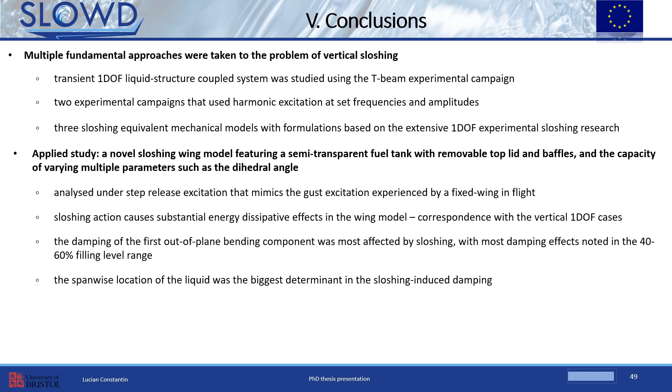Thinking about future work on this subject, there are multiple possible lines. From an experimental point of view, this work focused on the vertical component of the sloshing motion, as it is dominant in the wing out-of-plane bending motions. For the wing model researched here, no significant sloshing effects were found in other types of wing motions, such as torsion. Supplementary lines of work could, however, prove fruitful in the coupling of heave and pitch tank motions, which would be relevant especially for aeroelastic flutter-related investigations where bending and torsional coupling is important.

This last observation also leads to the idea of completing the aeroelastic picture with the inclusion of the aerodynamic component, which would be meaningful for the study of fuel sloshing effects on wing-integrated fuel tanks under in-flight conditions.

From a more fundamental point of view, it was shown that there is a substantial increase in the sloshing dissipative energy when impacts with the ceiling and bottom of the tank occur. Further research could be conducted into the possibility of tailoring the tank geometry to promote such impacts and passively encourage supplementary energy dissipation. Strategic modifications of wing fuel tank geometry at certain span-wise locations, without affecting components essential for fuel system functions or the structural integrity of the wing, may contribute to the passive increase of net structural damping and improve the aircraft response to gusts.

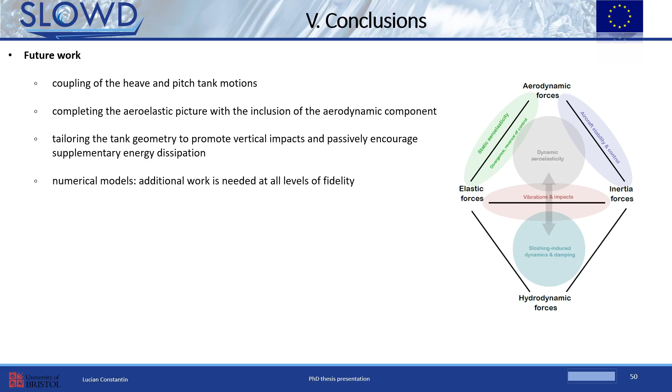To conclude, the experimental work and numerical modeling of vertical sloshing are important for passive gust loads alleviation. Sloshing-induced damping remains an active research topic, strongly motivated by industrial needs, especially with computationally inexpensive tools being highly relevant for the design and optimization of aircraft structures.